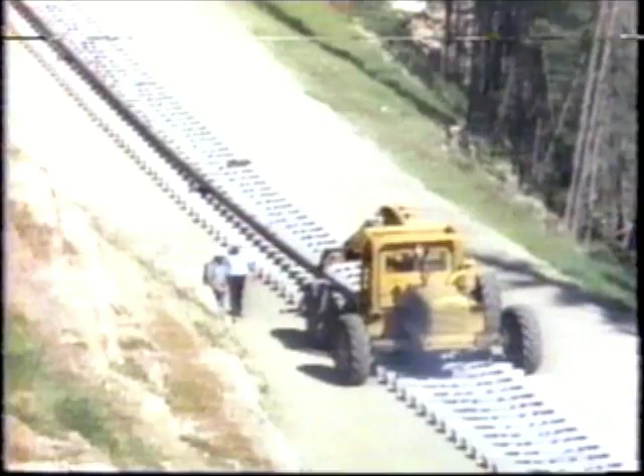The story of the building of the Canadian Pacific Railway more than a century ago is well known today, and it belongs to the heritage of our country. But now, there's a new story to be told: the story of the greatest railway construction project by CP Rail since that time.

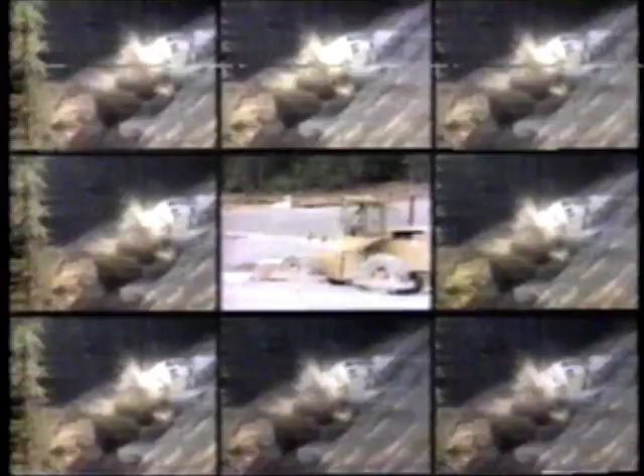This is a story of vision and foresight, of infinite planning and of inventive design. It's a story of intricate logistics and of complex machines, of sophisticated computerization and of basic construction. It's a story of massive dimensions and of pinpoint accuracy. But beyond all these, this is a story of human skills and endeavor, of extraordinary achievement, and of huge challenges met and overcome.

This is the story of the Rogers Pass project by CP Rail.

Rogers Pass, British Columbia. A wilderness little changed by time. Aloof, majestic, monumental, an awesome work of nature. Yet Rogers Pass has been railway territory for more than 100 years, and throughout that time, it has tolerated the railway, but has never been completely conquered by it.

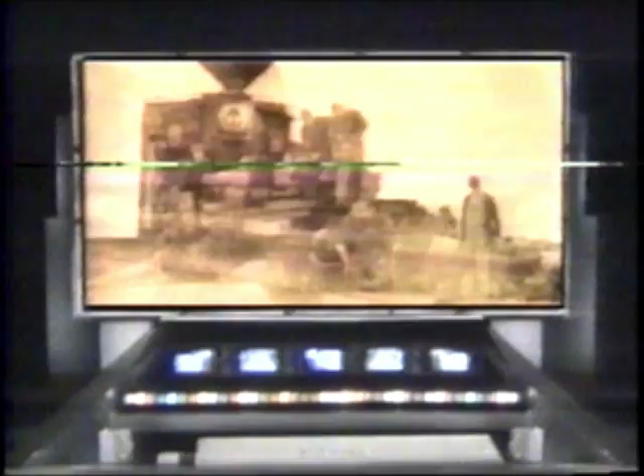Listen to Omer Lavallée, Canadian Pacific corporate historian and archivist, as he talks about the railway in Rogers Pass. At the time of the building of the railway in 1885, Rogers Pass was a formidable obstacle. It was only by sheer drive and effort of will, as well as by daring engineering devices such as the famous loops, breathtakingly high trestles, and toe-clinging construction on unsympathetic slopes that the builders confounded nature and pushed the railway through. But nature had her revenge.

Every year in Rogers Pass, an average of 970 centimeters of snow falls, enough to bury a train 2 or 3 times over. In the winter of 1885-86, a party of engineers was left at a camp in Rogers Pass, specifically for the purpose of observing the snow conditions and particularly the positions of known avalanches on the mountainsides. A major uncontrolled avalanche could really be very destructive.

On the basis of this information, in the summer of 1886, even as the first trains were running along the line, wooden snow sheds were built across the railway line at these danger points. As you can see, they diverted the fall of the avalanches and carried the snow safely across the tracks without blocking the railway. Lest the impression be given that this was the end of the problem, in fact it wasn't.

A completely different circumstance resulted in the line being abandoned in 1916. The pass was abandoned as a result not of the snow, but of the imperatives of increasing traffic. By the first decade of the 20th century, what is now CP Rail was experiencing a vast increase in traffic volume, in train size, and motive power and rolling stock had not yet begun to keep pace with it.

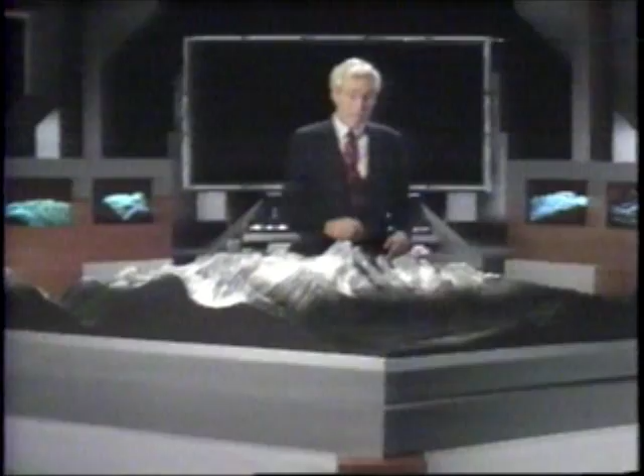Now, just what is the Rogers Pass project? Well, this grade reduction project has four major features: a 15-kilometer surface route, a short tunnel almost 2 kilometers long, a 14-kilometer long tunnel, and a very sophisticated tunnel ventilation system. The project begins here, near Rogers Pusher Station, where the pusher locomotives are now added to each westbound train. From Rogers, the route of the project goes west, along the steep slopes of the Beaver Valley.

This surface route is the first major feature of the project. On it, there are 4 bridges and 4 large concrete culverts on turbulent creeks and a steep gully. Finally, the surface route crosses a very long and complex viaduct structure.

And from there, the route enters a short tunnel, the second feature of the project, which takes it under the Trans-Canada Highway. The route then crosses the 5th bridge on the project and continues for a short distance to Mount Macdonald, where it enters the longest railway tunnel in North America, the 3rd feature of the project.

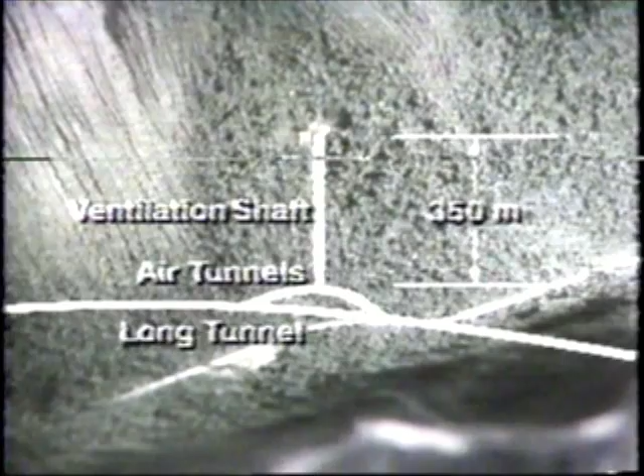This tunnel ends here, at the base of Mount Cheops, almost 35 kilometers from where the project began, back near Rogers Pusher Station. And the fourth feature of the project? Well, because the tunnel is so long, almost 15 kilometers, it has to be ventilated. So a large ventilation shaft from the top of this mountain goes straight down to the tunnel, 350 meters below. This shaft is the key to a unique ventilation system that clears the air so that the maximum number of trains can use the tunnel each day.

And that's the Rogers Pass project, a huge grade reduction program that will take more than 4 years of grueling work to complete. When the project is finished, the existing railway line will handle only eastbound trains going down its steeper grade, and the new line, with its reduced grade, will handle only westbound trains.

Now, how did the work on the project begin? Planning of Rogers Pass started back in about the mid-70s, so you can see it's been in the planning stage really at various levels for a considerable period of time. There were 4 different alternate routes looked at in the course of planning the actual route. The present route, that is the route that we finally constructed, was selected because it made the least effect on the environment. It allowed us to obtain the necessary grade that we wanted, and it was the best of the 4 for construction purposes.

There were extensive studies made of the proposed route: studies of the terrain, geology, environment, wildlife, water courses, visual impact. And then, of course, there were the basic considerations: can the project be built, and at what cost?

There were a number of approvals required. The first was from the Canadian Transport Commission, a very lengthy procedure requiring public hearings. There were also 2 years of environmental hearings at various locations throughout Western Canada. And finally, because most of the project is within the boundaries of Glacier National Park, a great deal of work was done with Parks Canada before final approval was received.

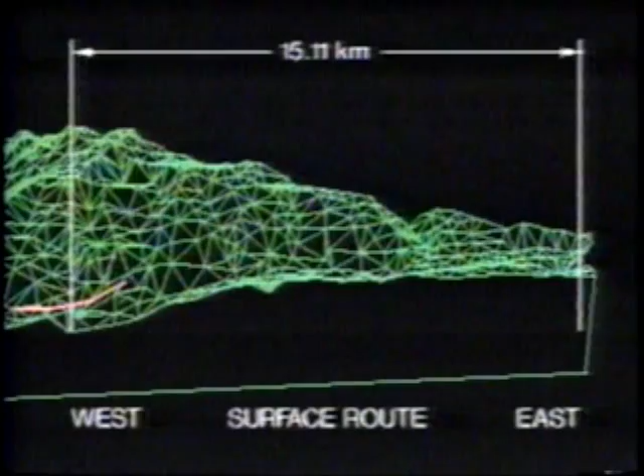Now let's take a look at the first major feature of the project, the surface route. The surface route is the key to the whole Rogers Pass project. Near the end of its 15-kilometer length, the reduced grade will be lower than the old line by the height of a 40-story building. Let's take a look at just what that involves.

Just west of Rogers Pusher Station is Cupola Creek Bridge, where the Rogers Pass project officially begins. Now you can see the position of the 2 railway lines, the old line on the right and the roadbed for the new line on the left. You can also see the grade reduction beginning to take effect already, as the old line, with its steeper grade, rises above the new line's roadbed.

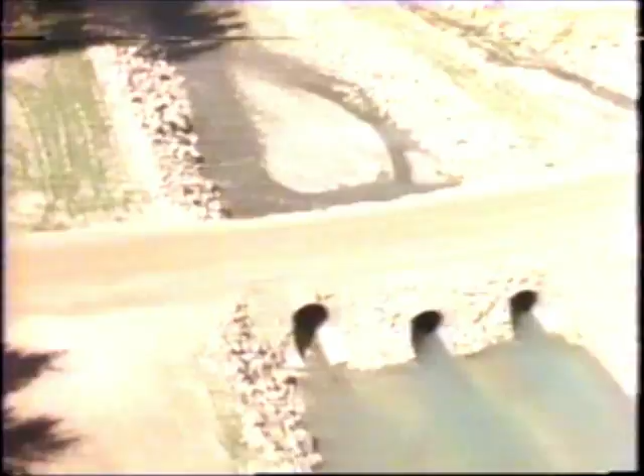Now let's see some of the construction challenges of this new surface route as we move westward. This is Alder Creek Culvert, which has already been completed and was a relatively straightforward construction. But here, the old line had to be moved back into the rock slope to make room for the new line between it and the Beaver River below. And here you can see the very narrow right-of-way in which the work had to be done because of its location in Glacier National Park.

Next is the site of the new Mountain Creek Bridge, which had some interesting problems to be solved. And just west of here is a major rock cut excavated to accommodate the new line. Opposite the rock cut, a huge embankment or berm will suppress the noise of passing trains at the nearby Mountain Creek campground. You can now begin to see the steep slopes over which the new line had to be built.

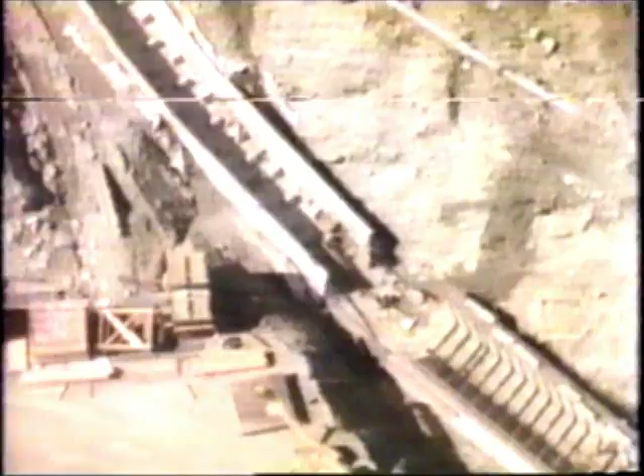Further west is the first of 3 concrete box culverts at Cedar Creek. Then another box culvert at Raspberry Creek, and a new bridge, Gully Bridge, over a dry gully. As we go west, the slopes and the construction difficulties become even more dramatic, as you can see.

This is the 3rd and last concrete box culvert at Surprise Creek. Can you imagine a constant 1% grade built through this formidable terrain? The survey work has to be extremely precise.

Next, the longest and highest bridge on the new surface route over Stoney Creek.

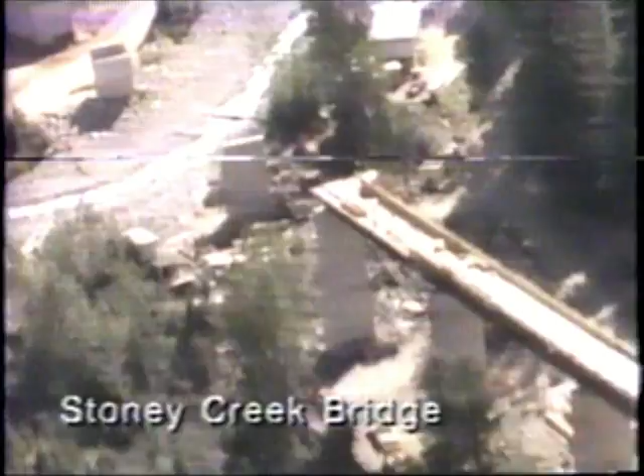Then, as we continue westward, we come to the site of the viaduct, one of the major engineering and construction challenges on the project, with its incredibly difficult slopes. We'll see these features in more detail later. But first, let's hear from some of the men who planned and built this route.

Here's John Fox. Well, to engineer a project the size of Rogers Pass requires, one, a lot of very competent people, and two, the use of a lot of engineering know-how. Ron Tanaka, Chief Construction Engineer, Special Projects, CP Rail, helps provide that engineering know-how.

All the engineering was done in Calgary before the work started. This began about 2 years even before construction began. The engineering work was done basically with the help of consultants. All the plans and specifications and contracts were prepared in our Calgary office.

And Norm Tennick, construction manager, special projects, CP Rail, is the man who sees that these plans are properly executed. My job is mainly to see that this project gets built, to put all the pieces together, to coordinate all the construction activities on site, including contractors, subcontractors, my staff.

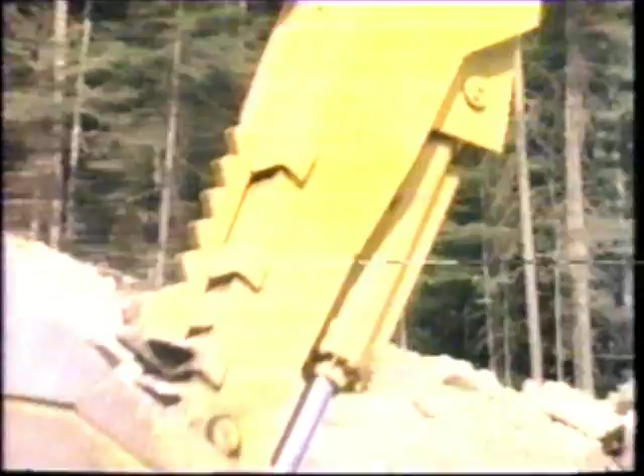The surface route comprised about 10 miles of new grade construction, mostly a cut and fill job involving over 2 million yards of excavation, of which 600,000 yards was rock. And traffic on the narrow right-of-way became an increasing problem.

But meanwhile, a number of complex construction challenges have been met and overcome on the surface route. Remember its 3 concrete box culverts and 5 major bridges?

Right now, we're interested in 4 of those bridges. The first is here at Cupola Creek. The challenge here was to keep trains running on the main line, while a new double-track bridge was built on the site of the old single-track one. So the old bridge was moved upstream out of the way, and trains were detoured over it while the new bridge was built in its place.

The second bridge is here at Mountain Creek, 4 kilometers further west and about 40 meters below the old line. The major considerations you have to be aware of when designing a bridge over streams, and in particular the streams that are in Glacier National Park, is you have to make sure that no part of the structure is within the wetted perimeter of the stream you're working on.

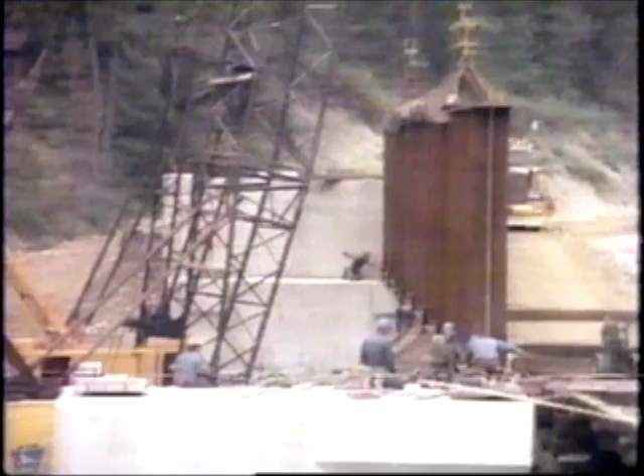That, of course, is an environmental protection measure. And as a result, one of the piers here at Mountain Creek had to have a specially lined dike built around it to prevent muddying the water during construction. The bridge has 2 48-meter spans, each weighing 250 tons, the heaviest on any of the bridges.

Next is Gully Bridge, about 9 kilometers from the start of the project. Gully Bridge, like all the new bridges on the surface route, was given a protective treatment of waterproofing before finishing.

Now, about 13 kilometers along the route, we come to Stoney Creek Bridge. The Stoney Creek Bridge is the highest and longest of all the bridges on the surface route. And because it can be seen from the Trans-Canada Highway, a lot of planning went into how it would look. As you can see, Stoney Creek Bridge was a major construction challenge. Work on the bridge began in 1984.

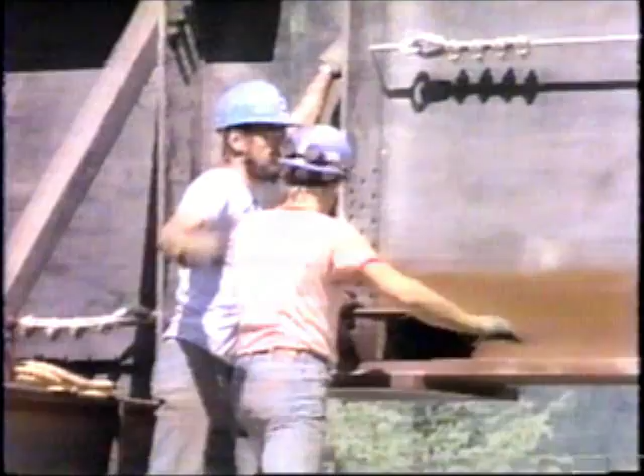The span that crosses over Stoney Creek itself is an extra long span, about 170 feet in length, and it was put there really to ensure that the piers on which it sits were not in the wetted area of the stream. Greg Hamilton, project engineer, special projects, CP Rail, hasn't forgotten those bridge spans or any other bridge spans on this project.

The one problem we did have with all bridges was movement of the spans to the site from the highway. In some cases, we had to get special permission from the Parks Canada people to cut down additional trees outside our right-of-way in order to move the spans to the site.

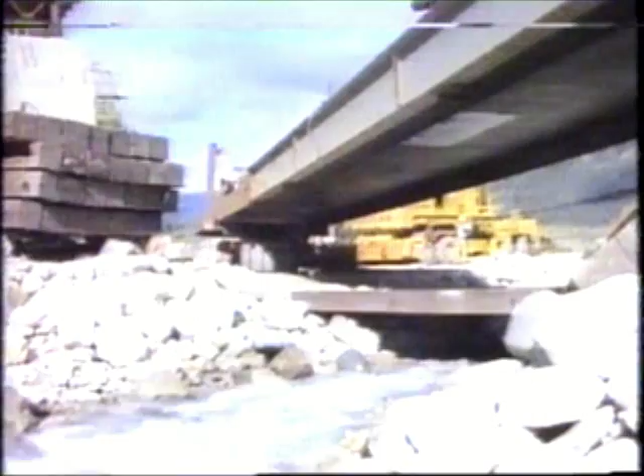But in spite of the difficulties, Stoney Creek Bridge and all the other bridges were finished on schedule. But there are other creeks on the surface route with a different kind of challenge.

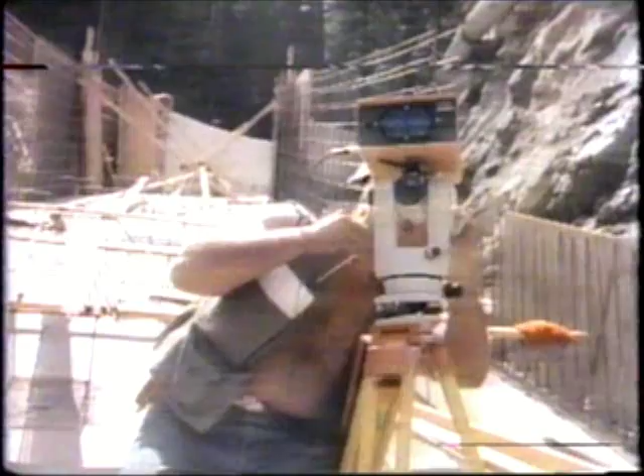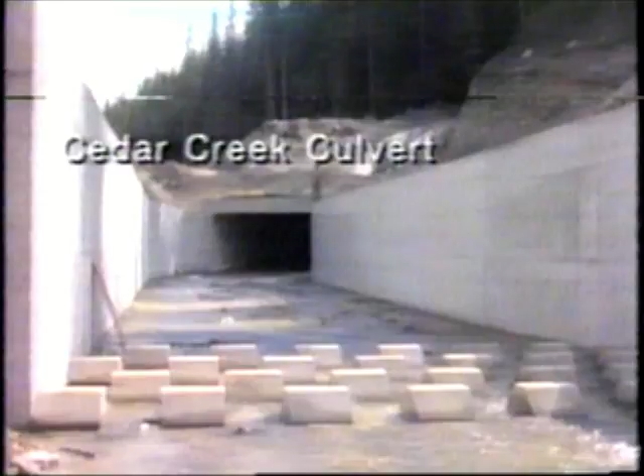Another interesting thing is that inside these culverts we have concrete energy arresters, which look like a series of tombstones. Their purpose is to dissipate the energy caused by the steepness of the culverts and the amount of water and debris coming down them. If you don't stop the energy of the water, it would cause erosion on the downstream end.

So you see that crossing a tiny mountain stream is not a simple matter. But that was only one of the many challenges on this project.

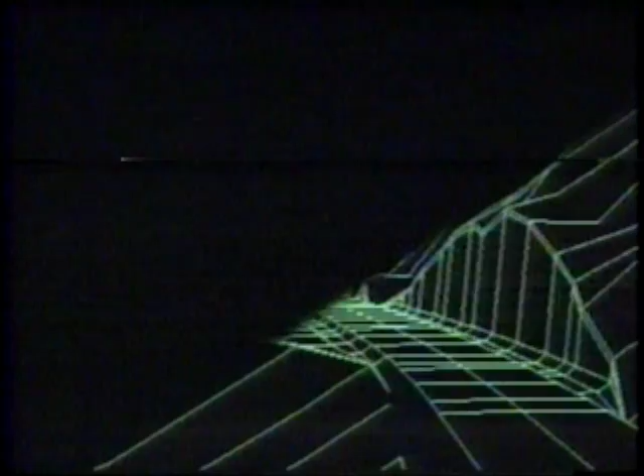Of course, the visual impact of a job of this size is important. One thing we did, which I think was a first, was use a computer to show us what it would look like after we were finished. From this, you could really determine the actual visual impact of what we were going to do.

Retaining walls are used in areas where you don't want huge cuts uphill or large fills downhill, which would become visible in terms of impact to visitors to the park, and ourselves for that matter.

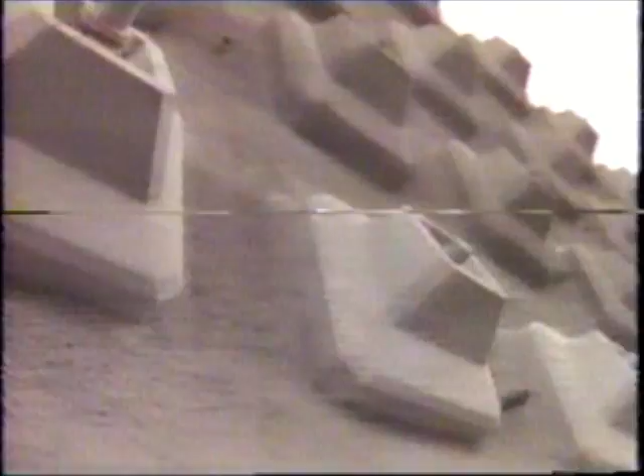In our case, the main factor influencing use of retaining walls was the slope of the terrain we had to excavate through. Being roughly 40 degrees, if we allowed the excavation wall to be on its natural slope, it would have undermined the existing main line, so we needed the most vertical retaining wall possible to prevent that. On the downhill side where we have fills, without a retaining wall the fill would have encroached onto the Trans-Canada Highway or the Beaver Valley below.

There are a great variety of retaining wall types. In our case we used shotcrete walls for uphill retaining walls, and a precast, tied-back type wall for downhill. The Type 1 retaining wall is basically two 2-inch thick layers of shotcrete reinforced with welded wire mesh.

The Type 2 wall is similar, except that there are ground anchors installed in a 7 by 7 foot pattern.

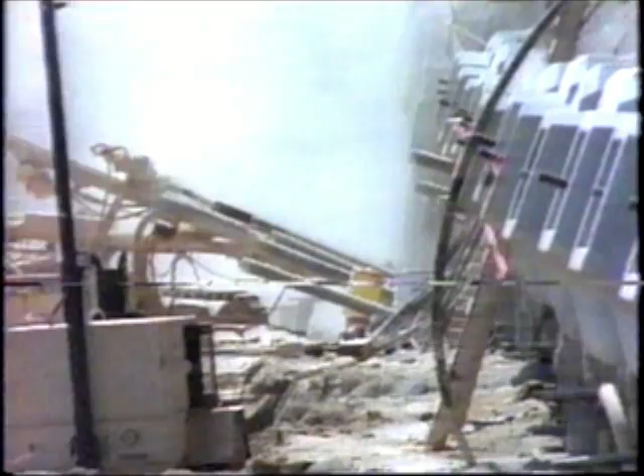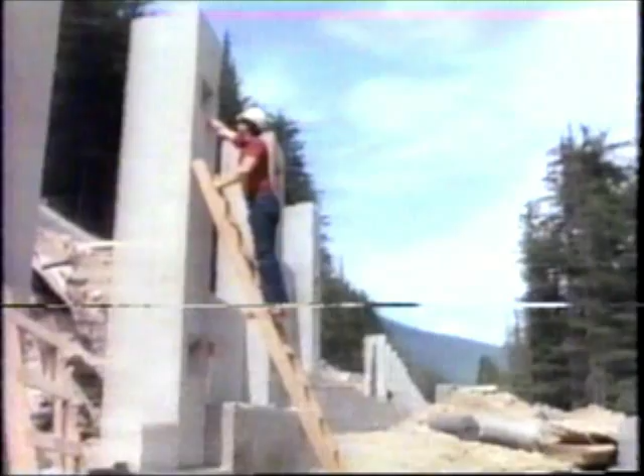The Type 3 wall is basically a series of precast soldier piles standing at 10-foot centers along the downhill line. It is a downhill retaining wall. Precast segments of lagging are installed between the soldier piles, and then the entire area between the original ground and the retaining wall is backfilled with local material to create a new subgrade.

The three major types of walls we used, I don't think they're absolutely unique to the Rogers Pass job—they've been used on other projects. I think the extensive use we made of them is perhaps unique. It involved about 230,000 square feet of retaining walls with about 120,000 lineal feet of ground anchors to support them, mainly because of the necessity to keep the right-of-way as narrow as possible going through the national park.

And next, that narrow right-of-way presented the greatest challenge of the whole Rogers Pass project: the 1,200-meter-long viaduct. Take a look at the problem from the air with Ron Tanaka.

The viaduct is a unique solution to the challenge of the terrain. The slopes, at 40 to 42 degrees, are steeper than anywhere else on the surface route. Ordinary cut and fill methods can't be used because they would undermine the existing track, and the new downhill slope would extend over the Trans-Canada Highway where it approaches the new line. Here's John Fox on the subject of this most difficult part of the project.

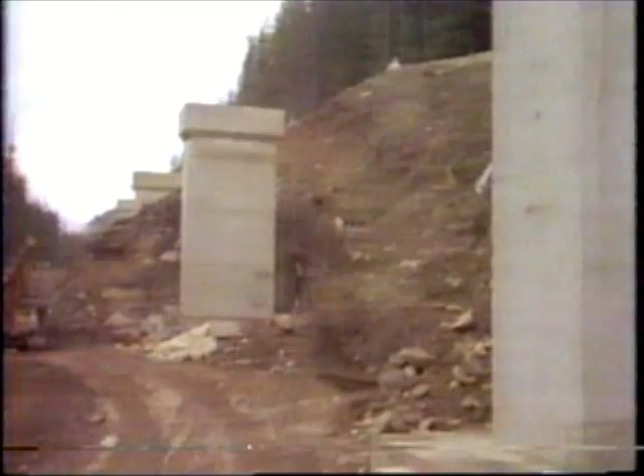The main concern in trying to design the viaduct was to try to design a footing on this 40-degree slope. The main difficulty is because of the 40-degree slope, there are side hill movements, and it's trying to design a footing to counteract this tendency of the mountain to move downhill on this 40-degree slope. Trevor Webster, Deputy Chief Construction Engineer, Special Projects CP Rail, explains how this was done.

Each pier will be built on a concrete footing and will be tied back into the slope with ground anchors. For additional stabilization, steel micropiles are sunk from each pier 10 to 15 meters into the ground. Access had to be maintained to every single pier in order to construct it, and each pier was at different elevations, up and down through gullies and hills, so access was extremely difficult.

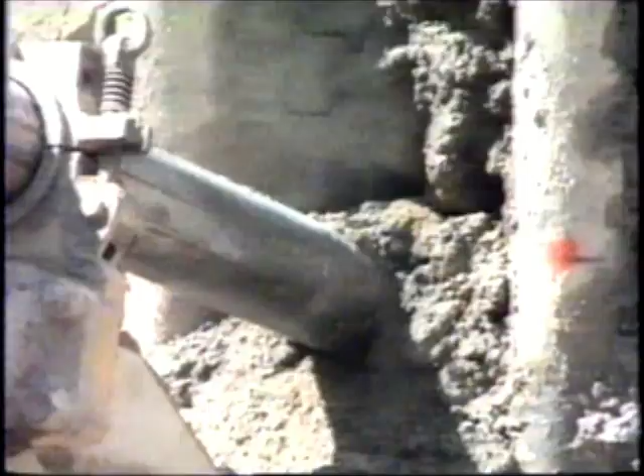Let's see how it was. First, the stabilizing ground anchors and micropiles were drilled and installed, as many as 30 micropiles for each individual pier.

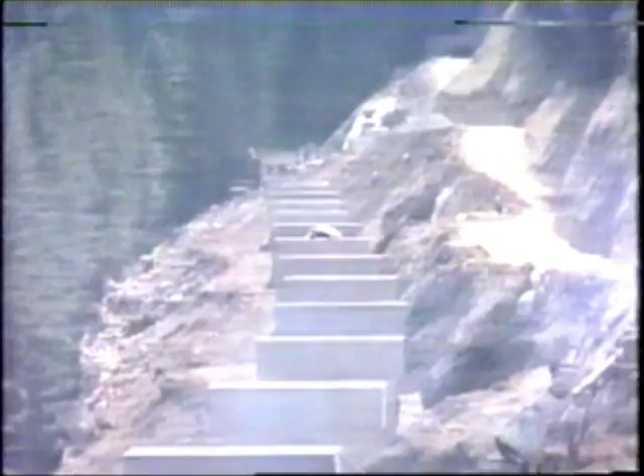Then forms had to be built for every one of the 44 piers, every one at a different height and in different conditions of slope and soil. Tons of concrete were moved in over the twisting tracks cut into the narrow slope. And finally, after 3 years of grueling work, the very precise construction of the whole kilometer-long viaduct could begin to be seen in this restricted and unfriendly terrain.

An interesting feature of the construction of the viaduct will be the erection of the spans. The method of installing the 45 spans on the viaduct was done by means of what we call a launching machine, or a launching bridge.

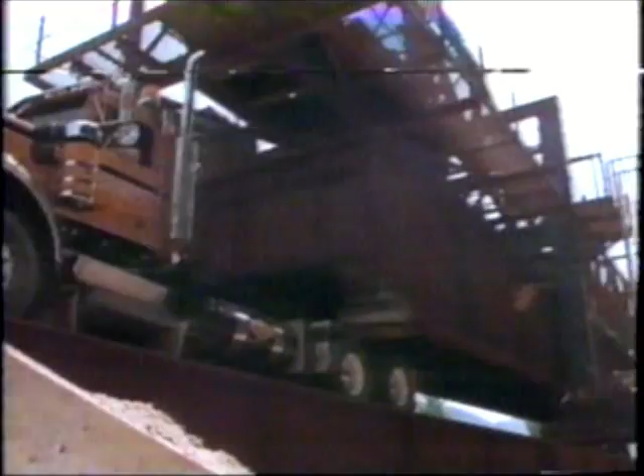The spans arrived by rail and were offloaded at the west abutment of Stoney Creek Bridge and loaded at that point onto a truck with a steerable dolly. The truck then backed across the completed grade to the viaduct and then approached the underside of the launching truss which sat on the viaduct. At that stage, it backed underneath the launching truss.

The launcher picked the span. The truck then drove back to the west abutment of Stony. The launcher then advanced the new span on a trolley system to its final location, lowered it in place, and then the whole launching truss advanced onto the newly installed span and awaited the next delivery.

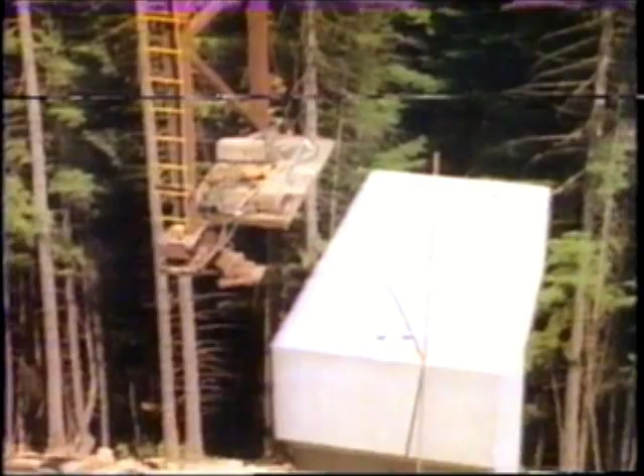Launching spans actually proved to be one of the brighter lights on this project. It went very well. The superstructure was constructed in 1 month. Insofar as the surface route is concerned, when we put the last span in that viaduct, the 45th span, when it went in, we broke open a few bottles of champagne that day. And that was a real highlight.

Well, you've seen the struggle with nature on the surface route, the building of its bridges, culverts, retaining walls, and the biggest challenge of all, the viaduct. But how did the environment come through all this? Let's take a look.

Remember this? Well, this is how that same area looked soon after the viaduct was completed. And now John Fox talks about the environment, its protection, and the reclamation of it that you see here.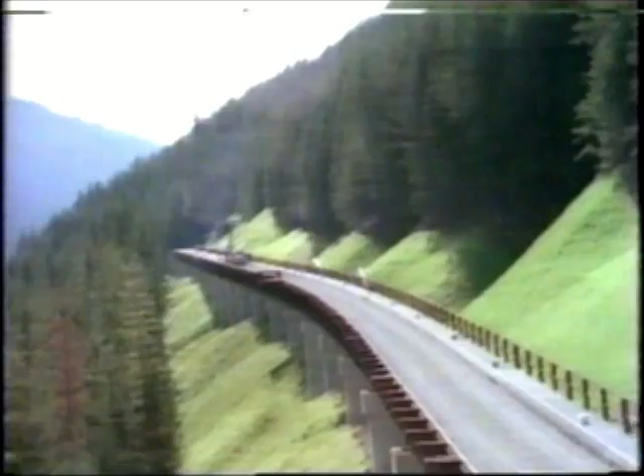The size of our Rogers Pass project meant that we were disturbing a very large part of the environment, and it required constant looking at on our part to ensure that we were living up to all the requirements of good environmental protection. While you're actually doing construction work, you have to worry about the environment and watch such things as oil spills, fuel spills, particularly from equipment that's working. You have to worry about bulldozer operators pushing fill or refuse into rivers. You have to worry about garbage around the construction site. We have people constantly watching for this sort of thing to ensure that doesn't happen.

The main purpose of reclamation work is to ensure slope stability. In addition to that, you have a responsibility when you go in and disturb land to restore it as near as you can to its former looks or beauty. In our case, it's beauty. And we have no right to go in and destroy something and leave it that way. Dave Polster, Environmental Supervisor, Special Projects, CP Rail, tells us how the environment is restored.

We'll be reclaiming continuously here as the grade is built. We'll get right in right after sections are completed, and even before the entire section is completed, we'll be reclaiming on the job. Parks Canada and CP Rail have reached an agreement regarding all aspects of the job, but particularly the environmental aspects, and we have a very rigid set of standards which we have to adhere to.

We expect that we'll be using somewhere in the neighborhood of 30,000 pounds of grass and legume seed and about 100,000 pounds of fertilizer.

We've ordered well over 600,000 trees and shrubs to be used in the reclamation project. The exact formulation was worked out between myself and Parks Canada in terms of enhancing wildlife values in certain areas, trying to keep wildlife away from other areas, things like erosion protection, and getting the new grade to look like the surrounding terrain. Certainly the environmental aspects of the job are built right into the heart of the project.

And Parks Canada has used it, I understand, as a standard for future projects of this nature. Reclamation work won't be considered finished until at least 5 years after construction is complete. And it will cost CP Rail several millions of dollars.

But now let's move on to the second major feature of the Rogers Pass project, the short tunnel, or the Mount Shaughnessy Tunnel, which goes from the viaduct to here, just across the Trans-Canada Highway. And why a tunnel? Listen to John Fox.

The first thing we looked at in the design stage was how we're going to get across this Trans-Canada Highway. We had one scheme where we would have come across the highway about halfway up the hill on a very, very high bridge. The big problem with that was snow, besides visual impact on the valley. We would have been plowing snow off a bridge and right onto the highway, and Parks Canada wouldn't have thought too much of that.

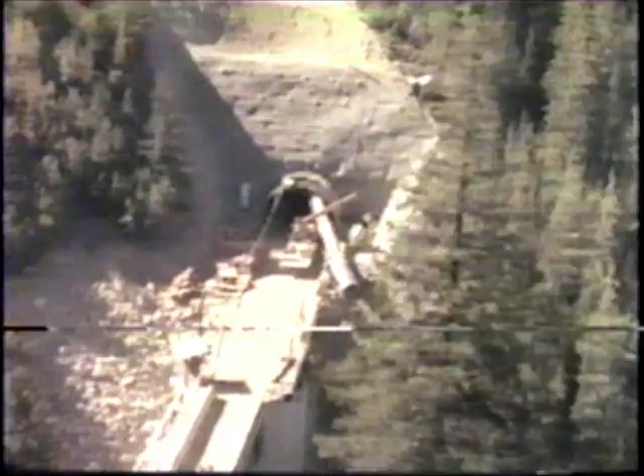And it comes out here below the Trans-Canada Highway. But curiously enough, the tunnel was built from this end back to the east end. Pete Penner, Tunnel Superintendent, Special Projects, CP Rail, tells us why.

Access to the east portal of Shaughnessy was very restricted because of the construction of the viaduct, and accordingly the contractor had to drive the tunnel totally from the west end. So only external work on the east portal was done. But the tunnel coming from the west had to meet that portal dead on.

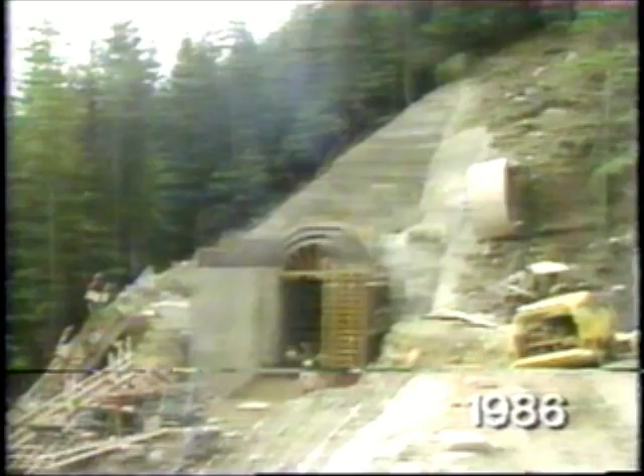Getting equipment and materials into this site was always a very difficult task through the congestion of other work on the surface route. Meanwhile, at the western end of the tunnel, work began with the construction of the Connaught Creek Bridge, the fifth and last bridge on the project. It had to be built first to provide access to the working face of the tunnel.

But remember the Trans-Canada Highway just above the west portal? Here's Ron Tanaka to tell us about the challenge that gave to the project planners.

From our geotechnical investigations, we knew that each end of the short tunnel would go through overburden. As a matter of fact, on the west side, we go right underneath the Trans-Canada Highway through an overburden section, and the depth of soil between the Trans-Canada Highway and the top of the tunnel is only about 40 feet. We were always concerned about this because in most tunnels going through overburden, there is always the possibility of subsidence or depression of the surface above, and in this case it was the Trans-Canada Highway.

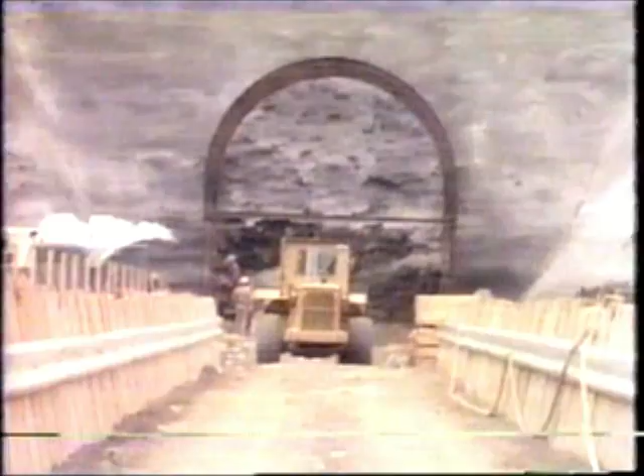What we did was grout the soil between the Trans-Canada Highway subbase and the top of our tunnel, so that when we went through with our excavation, there was basically a massive grout, not soil anymore, it was consolidated grout, which prevented any settlement of the Trans-Canada Highway. After that, building the tunnel could proceed. The west portal was finished, and inside the tunnel became a typical mining operation.

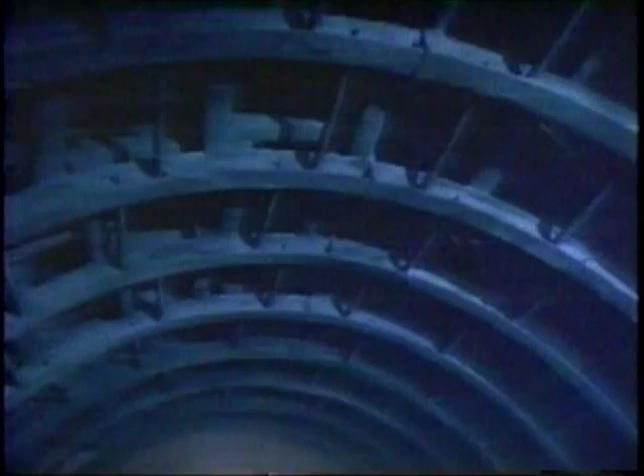It was built by the top heading and bench method. First, the top half of the tunnel is cut out and reinforced with steel ribbing and shotcrete where necessary. Then the benching operation removes the bottom half to complete the full depth of the tunnel.

But unfortunately, it wasn't all as simple as that. Listen to John Fox. The short tunnel gave us some real problems this past year in terms of soft rock, which we knew was there from the investigations we did. What we didn't know was it was going to come down on top of us after we passed it, requiring extensive support systems to be put in the tunnel and also a concrete lining in an area which we had not considered in design.

Nevertheless, the short tunnel, or the Mount Shaughnessy tunnel to use its proper name, did get built. And here, John Fox and Pete Penner are looking over another interesting feature of the tunnel work. At this point, we're between the two tunnels of the project, the short Mount Shaughnessy tunnel that we've just seen and the much longer Mount Macdonald tunnel just ahead.

Between them is a short section of surface route, not quite 1.5 kilometers long. But in that short stretch is a huge depression known as the Bear Pit, and the new railway line will have to cross it.

It will take about 400,000 cubic meters of material to fill the Bear Pit. And where do you think all that fill material will come from? Right, from the two tunnels.

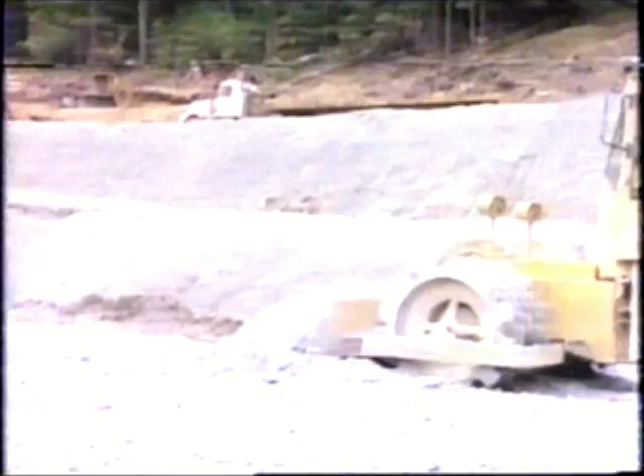So this is one depression that serves a useful purpose. If it hadn't been here, all that rubble, or tunnel muck as it's called, would have had to be removed from Glacier National Park for disposal somewhere else.

And of course, when reclamation is finished, the whole area will look a lot better than it did before, as you can imagine from what has already been done.

But now, let's get on to the third major feature of the Rogers Pass project, the Mount Macdonald Tunnel, or the Long Tunnel, which goes under two mountains and is the longest railway tunnel in North America.

The Long Tunnel begins here at the eastern end of Mount Macdonald. It goes under the mountain, under Rogers Pass, and under Mount Cheops to come out here, almost 15 kilometers from where it began.

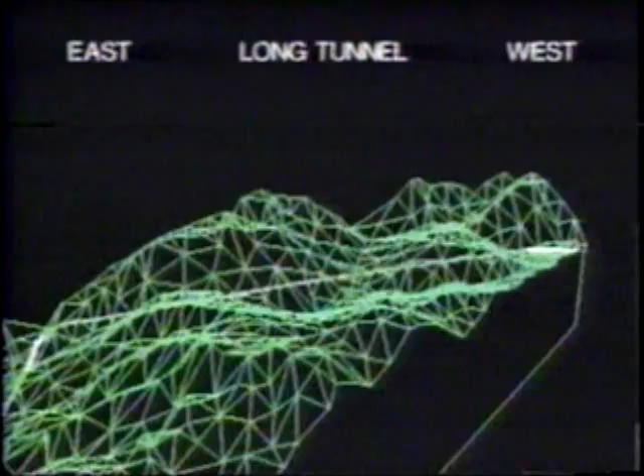The new tunnel will be 109 meters below the old Connaught Tunnel and 290 meters below the summit of the pass.

But the very length of the tunnel created some problems in construction. It was necessary to excavate the long tunnel from both ends, really to save time in terms of getting the job done. Because of the length of the Mount Macdonald Tunnel, it would have not been practical to do the excavation and concreting completely from one end.

The entire tunnel is about 47,000 feet long, and doing it from one end would have taken about 5 or 6 years. Plus the fact by cutting it from each end, we were able to give it to 2 contractors, and there's always this feeling of competition between contractors to do a faster and better job, and this, I think, aided in the progress of the work.

Another thing too we had to consider was that if one contractor, doing it from one end, encounters some geotechnical problems, the entire rest of the tunnel would be delayed. By cutting it from 2 ends, if one contractor had a problem, the other contractor probably would have been able to continue. And how would the contractors cut the tunnel?

Construction methods used in excavating the long tunnel were really left up to the contractors. We, that is the railway company, we didn't dictate how they could do it. It was left up to the contractors themselves. And really what dictated the different methods was the type of rock.

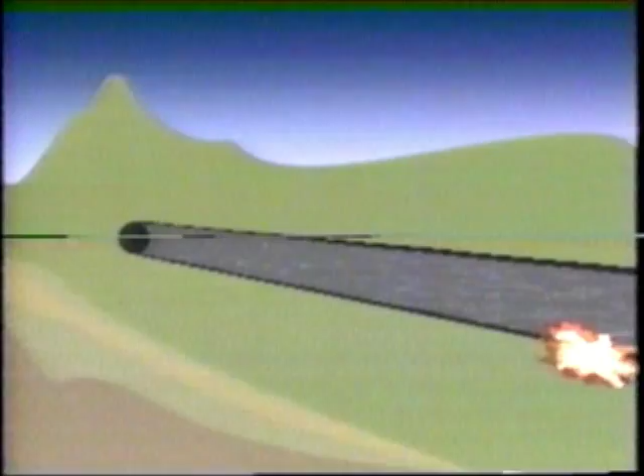The 2 methods used to excavate the tunnel: on the east end, the contractor elected to use a 22-foot diameter mole to take out what we call a top bench, and then come in behind and take out the bottom bench to give us the shape of tunnel which we wanted. Whereas the contractor from the west end, he decided to go full face and excavate the entire face as he went in one shot. So we have 2 sides to the Mount Macdonald Tunnel and 2 different construction methods, and maybe even a race to finish first.

Now, here's the east portal of the Mount Macdonald Tunnel, away back in 1983. Let's watch it progress.

Work started on the east portal in August 1984, with the first blasting into the rock face. The tunnel began with the conventional top heading and bench method for a short distance into the rock, and work was started on the portal structures.

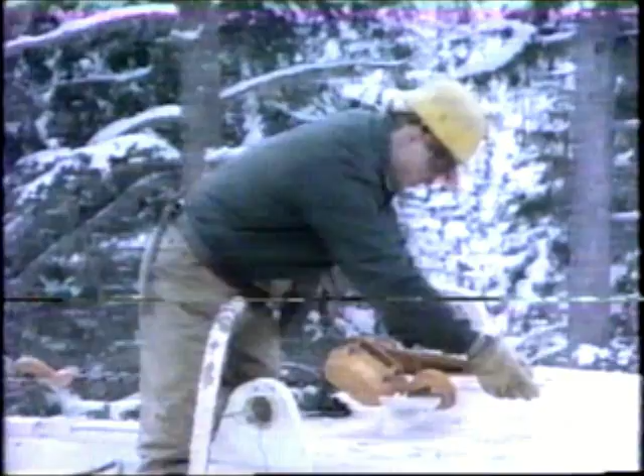Then, in late 1984, the star of the tunneling work at the east portal arrived and was assembled in the snow. This was the tunnel boring machine, or the mole, as it was called. The biggest problem was that the contractor was assembling a white-painted mole in the middle of the winter, which made finding parts somewhat difficult at times.

But driving a tunnel through the rock of the mountainside did present some greater challenges than that. The kind of information we need in designing this long tunnel is basically all kinds of geotechnical investigation. We have to find out whether the tunnel is going through overburden or rock, and also try to determine what kind of rock it's going through, whether there are faults, whether we're going to hit water, whether we're going to hit gases - all these things which you always encounter in tunnels.

We get this information basically by two methods. The first thing we did is go out and examine the surface, and by examining the surface contours and the ground types, and also the location of faults at the surface, the geotechnical people are able to predict whether we're going to hit these faults down below or not at tunnel level.

The second thing we did was to drill a series of diamond drilling holes to examine the type of rock or soil in which the tunnel will be going through.

The long tunnel, Macdonald Tunnel, is a 47,000-foot tunnel driven in phyllites, which is a very soft rock, and quartzite, which is very hard. Most of the phyllites are in the eastern section, so the contractor chose to drive a top heading there with a TBM, 22 foot 4 inches in diameter, and then take out the bottom by conventional drill and blast, or a benching operation. The finished tunnel will be 5.2 meters wide and almost 8 meters from rail to roof, and it will be concrete lined, lighted, and ventilated.

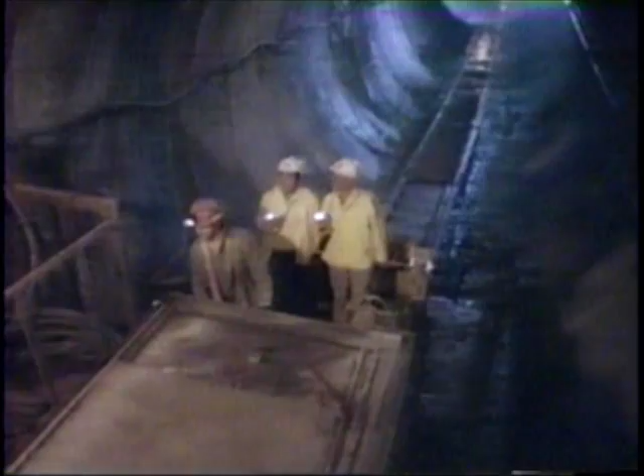The main difficulty in constructing the east portal, or east section of the long tunnel, is its length. The total length on this contract was 27,400 feet, and the difficulty in these longer tunnels of 5 miles or more is the transportation of all the men, the materials, the muck coming out of the boring machine, the explosives when we start drilling and blasting the bench, and the concrete. It's the organizing of the transportation and handling of materials that becomes the main problem.

The mole is about 18 meters long and weighs over 300 tons. Up front, on the rotating cutter head, there are 52 cutting discs that grind the rock into small pieces which are scooped up. Two muck trains are in operation, one being loaded while the other empties. The mole can be steered through curves and adjusted up or down to ensure an accurate heading.

But the mole did have some difficulties. The bearing came apart on the mole and caused about $1 million in damage to the machine, and lost 2.5 months getting it repaired. After that, we were concerned that the mole would stand up for the rest of the excavation - there were still 3.5 miles ahead of us.

The rock was better than anticipated, and the mole, in spite of the 2-month breakdown, did finish tunnel boring on schedule.

When all systems were working, the mole would average possibly 140 to 160 feet, about 150 feet on average. Its best production - we set a record for that size of mole in this kind of hard rock - was 206.3 feet in one 24-hour day. So the mole bored 5 miles into the mountain, right on schedule.

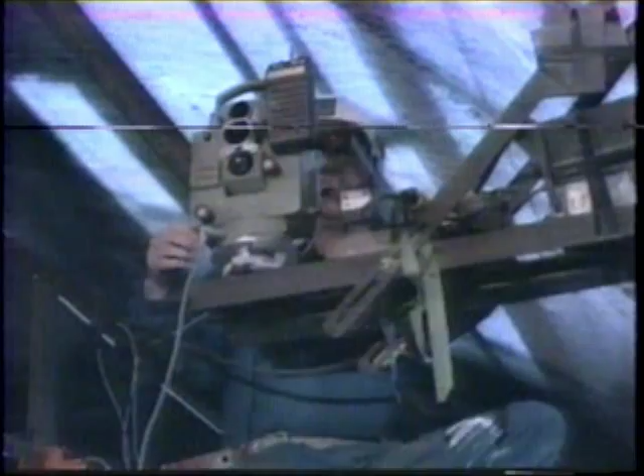So, how's the alignment coming today there, Tom? Half an inch high. To check on the accuracy of the tunnel, a survey is done by CP Rail every 240 meters that the tunnel advances. This survey is performed with electronic theodolites to check the alignment and height of the recent excavation.

Satellites were recently used to check the primary surface control points at both the east and west portals. This is the first time that global positioning system satellites have ever been used in an underground mining operation.

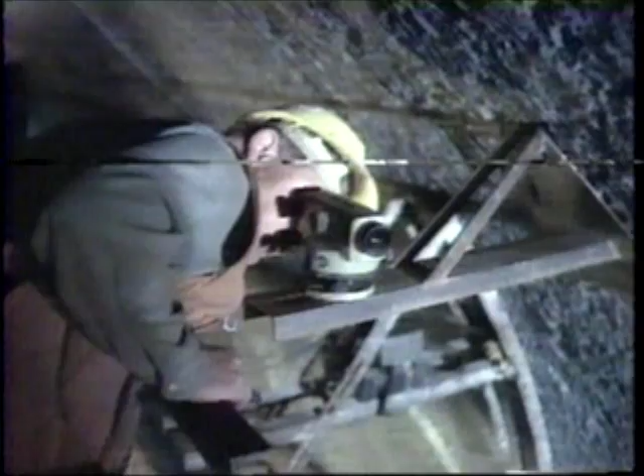From these satellite-verified surface points, the survey control is brought forward to the working face by conventional survey methods. This survey control is then used to align the laser beam that guides the mole.

The benching in the east portal entailed taking out the bottom 11 feet of the tunnel. The mole bored 22 feet, and in order to get the tunnel configuration we wanted, a square section had to be taken out of the bottom of the tunnel.

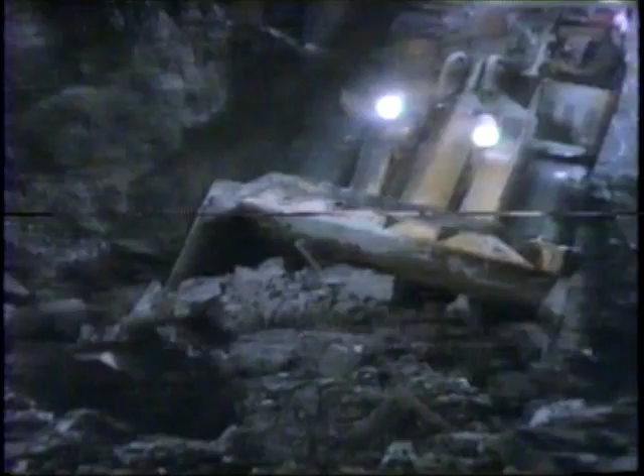After benching is completed, the contractor has to go in and backfill the sub-invert and install the drain pipes. Then he pours what we call a pony wall, or starter wall, in order to align his main arch form. The starter wall also embeds all the electrical utilities and services we require for the permanent tunnel operation.

After the pony wall is poured in the east tunnel lining, the contractor uses a traveling form so that the concrete is advancing continuously. He has a 288-foot form which keeps moving ahead of itself. It's sort of an inchworm principle, you could call it, I guess.

Now, did all this work on the tunnel have any effect on the environment? The construction of the tunnel basically would affect the water courses in and around the project, mainly because of the ammonia released from the blasting powder used in excavating the tunnels.

We have at each portal of the tunnels a huge wastewater treatment plant, and all the water coming out of the tunnels, which does have some silt and oils in it because of construction activities, is cleaned out before it enters the streams in the parks.

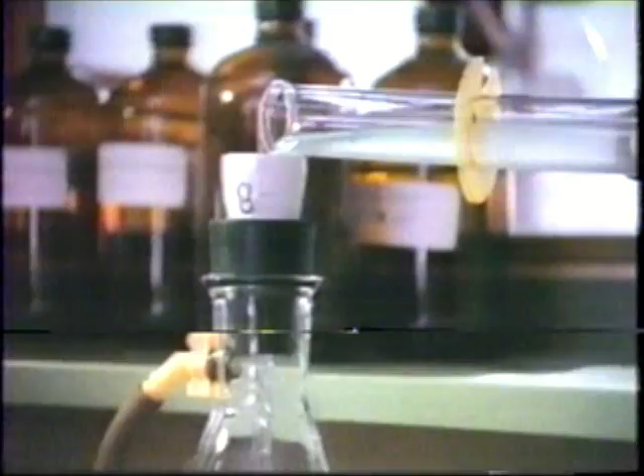In addition, vital tests of the various processes of construction are carried out in the lab and on location throughout the project.

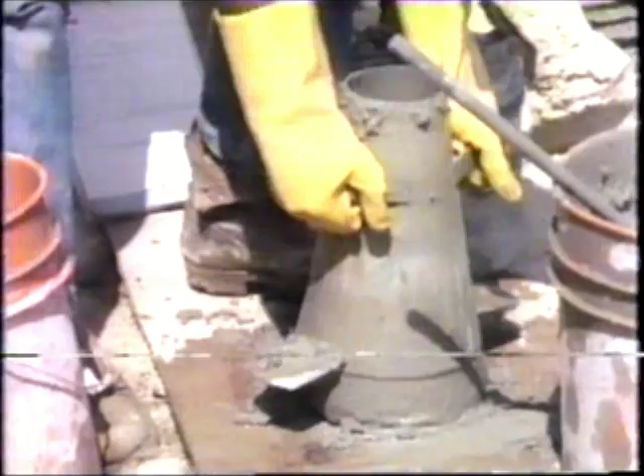Now let's go on to the west portal of the long tunnel. As we leave, we'll get a good view of the east portal.

This is the summit of Rogers Pass. We're roughly following the direction of the long tunnel, which is about 340 meters below the slope of the mountain. And here's the west portal, coming out of the mountain below Mount Cheops, 14.7 kilometers from the entrance.

You can get a better idea of the size of the tunnel from this angle. It's much bigger than it looks from the air. Here we use the drill and blast tunneling technique, which is standard mining procedure. Okay, Ron, let's go inside and take a look.

Now this is the way the finished tunnel will look.

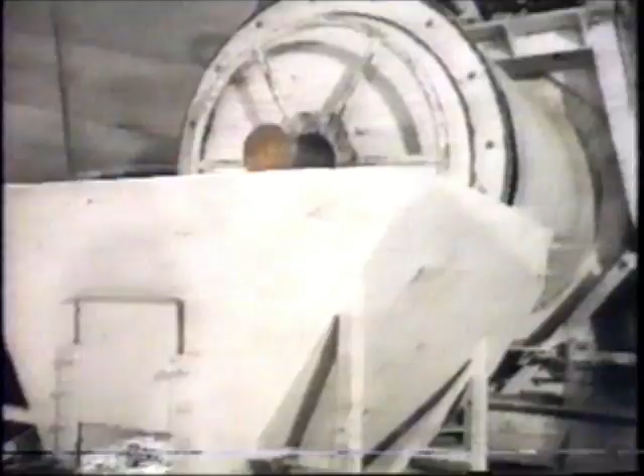Lining is done with a movable 25-meter long steel form. Concrete brought in by rail-mounted agitator cars is pumped in behind the forms to build the finished walls and arch of the tunnel. On average, 15 meters a day can be completed by this method, with crews working in 3 shifts, day and night.

You see the difference in the two tunneling techniques. At the east portal, we saw an unfinished tunnel until the very end of the work. Here at the west portal, the finishing of the walls and arch progresses as the tunnel is cut forward. Then we come to the unfinished part of the tunnel.

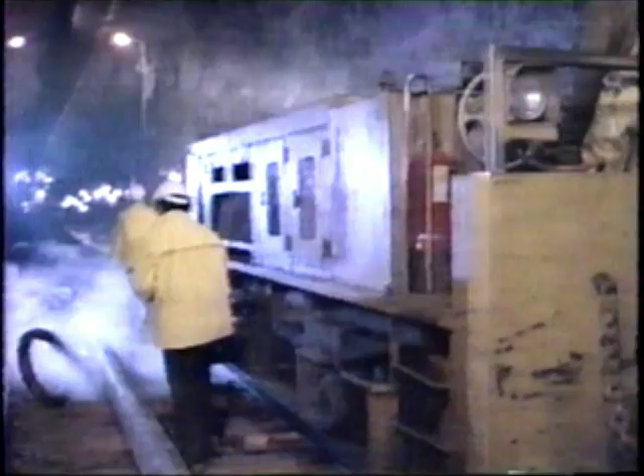Let's listen to Ron Tanaka. This is the beginning of the process of drilling, blasting, and mucking out the rubble. The jumbo drill cuts 100 holes about 4.3 meters deep into the rock face. The drill holes are filled with explosives and blasted out.

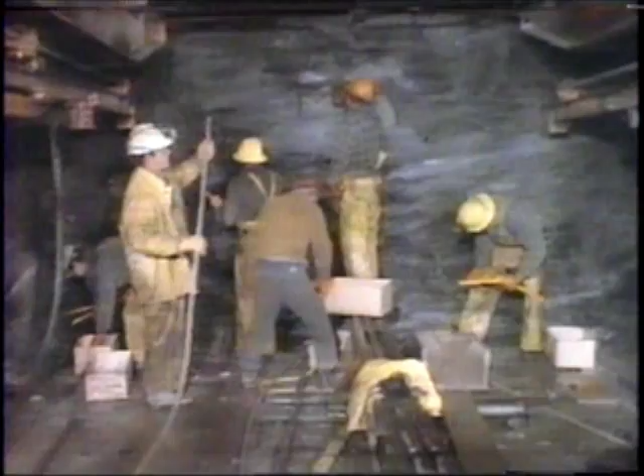The blast loosens the rock, and then the loader moves in to remove the rubble. With this technique, in 3 shifts a day, about 4 cycles of drilling, blasting, and mucking can be done. This advances the tunnel about 15 meters each day.

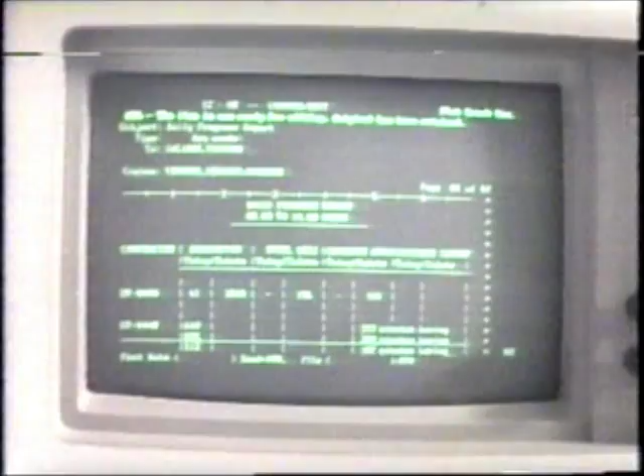The actual construction progress of the tunneling was monitored on a day-to-day basis by my own engineers in the field, and of course precise records have been kept of the actual daily footage that was accomplished.

Staff geologists map the rock in the tunnel every day. It provides a necessary basis to determine permanent support for the tunnel rock. From this mapping, the geologists then decide where to place rock bolts to reinforce the tunnel walls. Because rock is not a homogeneous medium, rock bolts are used to stitch it together.

Okay, if rock bolts are used to reinforce the tunnel, why does it have to be lined? The short tunnel isn't lined. The lining in the long tunnel is required strictly for ventilation purposes. It's not a structural lining. There's no reinforcing in it other than in a few places where we have less than adequate rock support. But generally it is strictly to make a smooth pipe for airflow. We'll come back to that airflow later.

But now, what about lighting? Does a tunnel really need to be lighted? Tunnels generally are not illuminated in North America. They're generally quite dark, and when it comes time to do any work in them, you have to take in either portable generators or whatever to provide the light for the workmen to work in. It's really not the way to work. When we designed the Mount Macdonald and Shaughnessy Tunnel, we'd made up our minds we had to have power up there anyway. So let's put some lights inside so at least our maintenance people can see what they're doing.

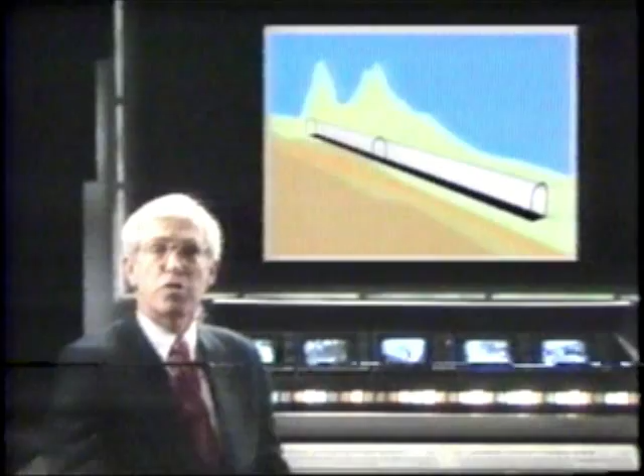The ventilation system for the long tunnel is the fourth major feature of the Rogers Pass project. It is very sophisticated and is the only one of its kind in the Western Hemisphere. It has three key elements: a divided vertical shaft from the top of the mountainside to the tunnel, an arrangement of very powerful fans for pushing and pulling air through the tunnel,

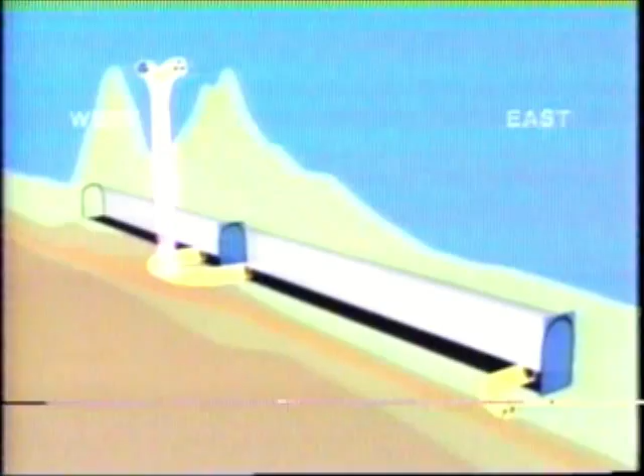and two automatic gates which control the flow of air in the tunnel as trains pass through. As the train approaches the tunnel from the east, the portal door opens, and a cooling flow of air is drawn from the ventilation shaft and pushes exhaust gases out through the portal. At the center of the tunnel, the automatic door lets the train through, but then closes again as a cooling flow of air is drawn from the west portal and out the ventilation shaft.

For cooling and purging purposes, the long tunnel is effectively divided in two, which means the operation can be done much faster, and trains can pass through at intervals of about 35 minutes. This may sound like a long time between trains, but a unit coal train with more than 100 cars will take about 30 minutes to pass through the tunnel. So you can see that the operation will be very efficient, and it's expected to increase daily westbound capacity from the present 15 to at least 24 trains per day.

But building the 350-meter ventilation shaft for this system was a challenge all its own. In the design of all shafts, most designers try to find an area where there is as little overburden as possible, because excavating and constructing through overburden in a shaft is very expensive. The initial location we had in our choice for a shaft was an area where the rock was exposed to the surface, which would minimize the amount of overburden we had to dig through.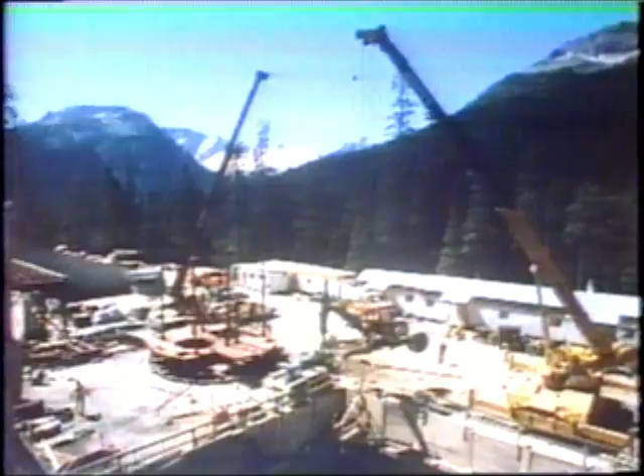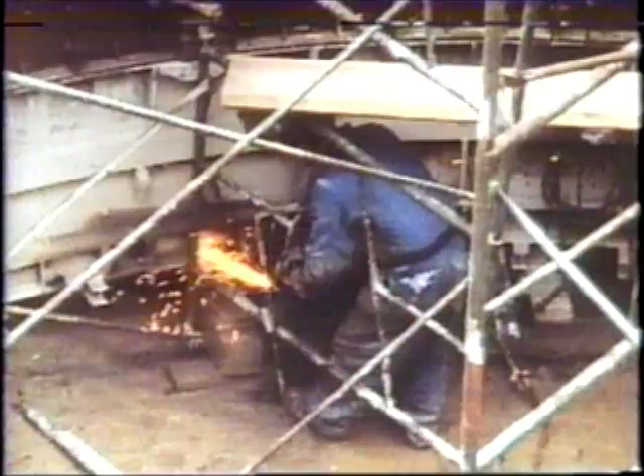In excavating the shaft, the most difficult geotechnical problem to overcome is the infiltration of water. And it's not just the quantity of the water, but the mixture of the water and the type of soil which seeps into the excavation. It makes it very difficult to support the walls of the excavation while construction is going on.

In sinking through the overburden, we encountered water problems that the contractor could not handle, and consequently we ended up having to freeze the last 150 feet of overburden in order to excavate through it. This was done from the inside of the shaft, which to my knowledge was the first time that a shaft of our size had ever been frozen from the inside.

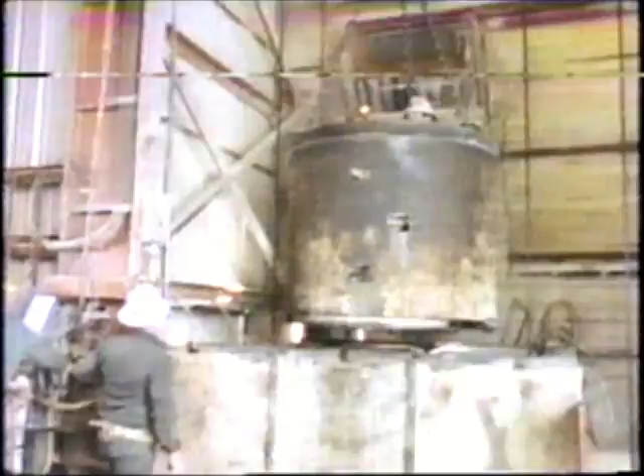This involved drilling 48 holes on a fan, fanning out from inside the shaft to form a perimeter of freeze holes, pumping brine through the holes and freezing a 6-foot thick ice wall minimum, and then sinking the shaft inside this ice wall.

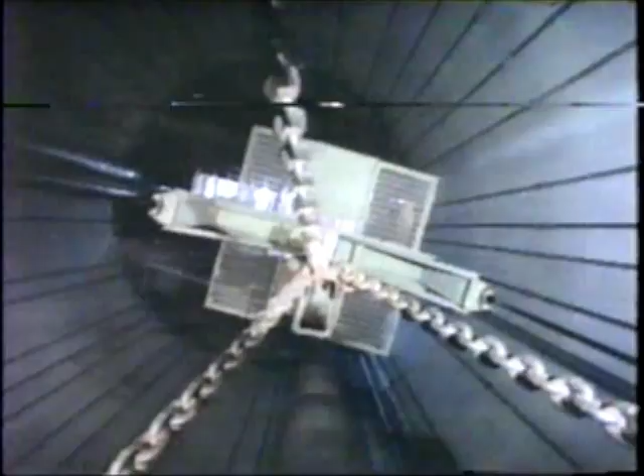Most of our problems were in the overburden, but after we got through that into the rock, progress went very well.

As we have seen, the ventilation shaft has a dividing wall separating the east and west ventilation functions, and it's connected to the main tunnel by two smaller air tunnels. Between these, in a huge chamber over the main tunnel, is the 80-foot gate building, which is part of the ventilation system. Back on the surface, at the top of the ventilation shaft, is a very large building which houses four huge fans and the computer controls for the ventilation system.

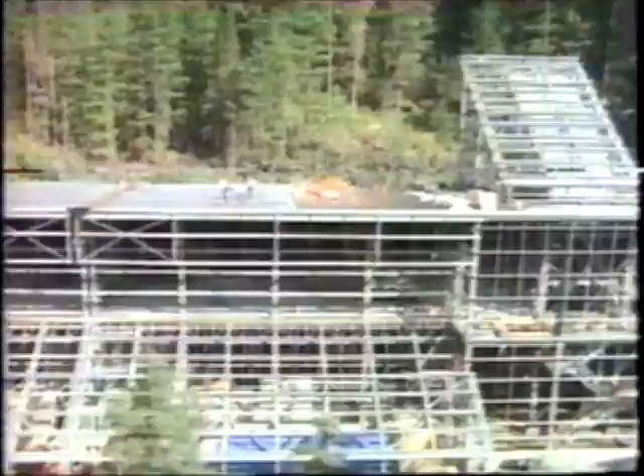And as we know, the visual impact on the environment is very important on this project. The ventilation building is located at the top of Rogers Pass in a very sensitive area, and to make sure that no part of the building was seen, we located it up on the slope away from the Trans-Canada Highway in an area where we have trees in excess of 100 feet in height. The building being only some 70 feet high, of course you can't see it.

Meanwhile, back on the surface route, the railway line was being laid for today's traffic and for the future. The ties and rail have been designed for the heaviest cars that we operate and will operate in the future, so it'll take care of future traffic. The track structure which we'll put in on the surface route will consist of concrete ties.

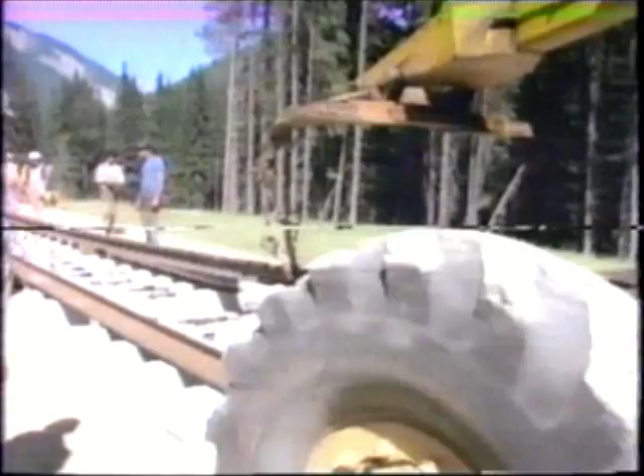They'll be spaced roughly on 2-foot centers, except for curves where they're spaced a little closer. It'll have a 136-pound welded rail, held in place on the ties by spring clips. The track will be ballasted with a good quality rock ballast.

The old system of wooden ties and iron spikes is gone, from the Rogers Pass project anyway. It's the largest installation of this new system on CP Rail. The advantage of a concrete tie track mainly is one of less maintenance. You don't have to change ties, and the question of changing rail is made easier and cheaper. Again, it's a cost reduction as far as maintenance is concerned.

And how about the tunnels? What will the rails be laid on in the tunnels? Pack track, which we're going to use in the tunnel, will be used only in the tunnel. The main reason for it being used only there is that it's on a rock surface, and that gives you the maximum support. If we use it on any part of the surface route, we'd have to lay a very thick base slab in addition to the actual pack track itself, which is extremely costly.

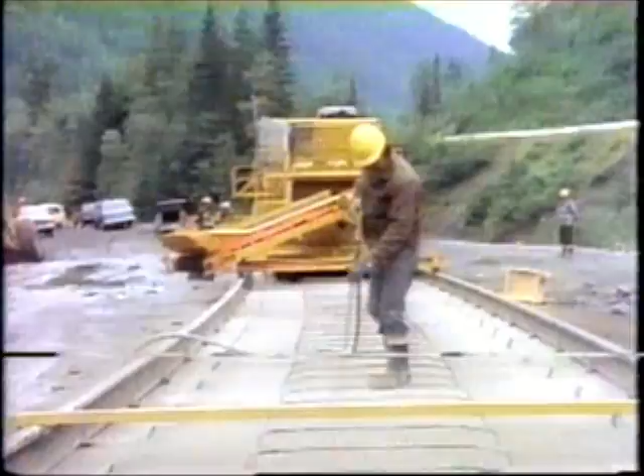Ed Taylor, supervisor of track design and development for CP Rail, was involved in testing the pack track system for the railbed before the final decision was made to use it. PACT track really is paved concrete track. It consists of 2 concrete structures, a base slab and a top slab, with continuous CWR rail, and essentially it's used primarily in tunnels. The idea is to get it established and determine its validity before it's installed in the tunnels at Rogers Pass.

Perhaps the integrity of the entire Rogers Pass tunnel project is based on how well the track performs. We're evaluating the entire structure, that is, the reinforced concrete base slab, top slab, the fasteners, the method by which they're held, and rail life.

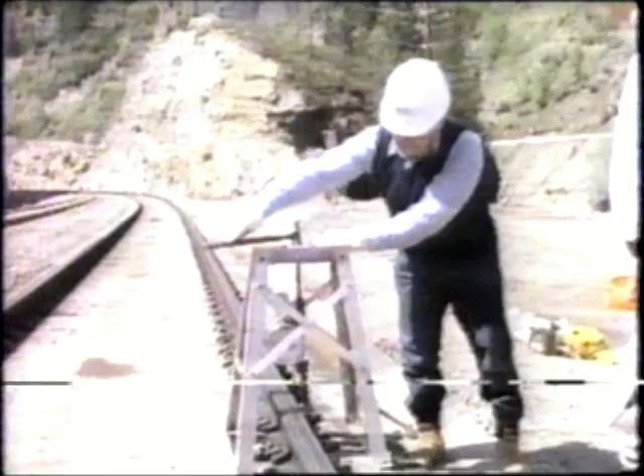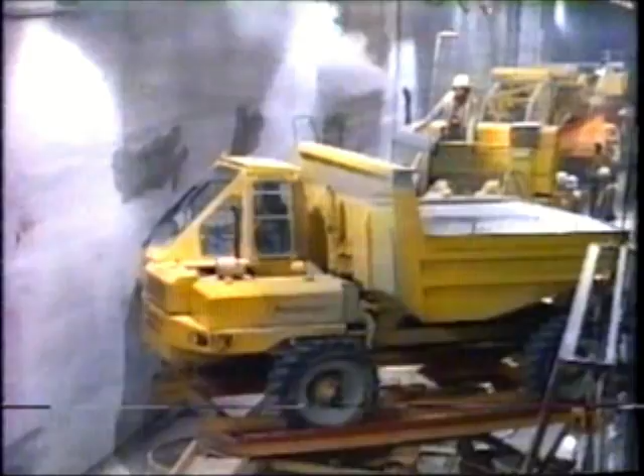The test section of pack track performed very well, and so it was installed as the rail bed for the track in the tunnels. Let's let John Fox have the last word. The main advantage of using pack track is the fact that there's very little or no maintenance required over the years that it'll be in service. There's no ballast to change, no ties to change, no spikes, no tie plates. It's virtually a maintenance-free system.

So with the new track laid on the surface route and in the tunnels, the Rogers Pass project is now almost complete. But first, the whole system on the new line has to be checked out in operation. A new line of railway is always inspected before you put it in service. The major reason is to ensure that the line is properly built and is built to the proper standards. In addition, you want to ensure that all aspects of safety are covered.

When we open the line up for regular traffic, we don't expect to do any further testing on our new line of railway. It should be in proper operating condition when we say go. You look at pretty well everything that comprises a piece of railroad. You check the turnouts and the switches, the rails, the welds, how the rail is fastened to the concrete ties, bridges, culverts, the entire structure of the railway.

You inspect all monitoring equipment, such as hot box detectors, dragging equipment detectors, high wide load detectors, CTC signals, power switch machines, and so on.

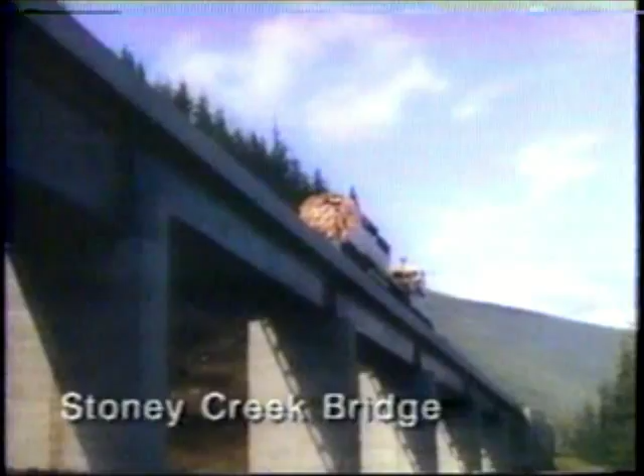All structures on a new line are inspected to make sure that they're properly built. We won't be watching any particular part of this new line any more closely than we inspect any other part of our railroad.

The viaduct is essentially a series of 90-foot bridges, and we don't have to do any particular type of tests other than put the thing together properly, which we've done. Our design and construction techniques were such that all we require is an annual maintenance inspection, which we do on a normal basis.

When we go through the short tunnel, you'll see the difference between it and the long tunnel. Remember, the short tunnel isn't ventilated, so it doesn't need a full lining like the long tunnel does to help the flow of air in its ventilation system.

Of 40 years service on the railroad and the trackage that I've been over, I would say this is the best piece of track that I've worked on.

When a train approaches the portals, it's on what we call a signal circuit, and in the signal circuit there's also a circuit that will actuate the door mechanism. The mechanism that opens the portal door is an electric motor with a chain drive to the shaft of the door, which raises the door up and down in a guillotine-type fashion. The portal door takes about 15 seconds to fully open up.

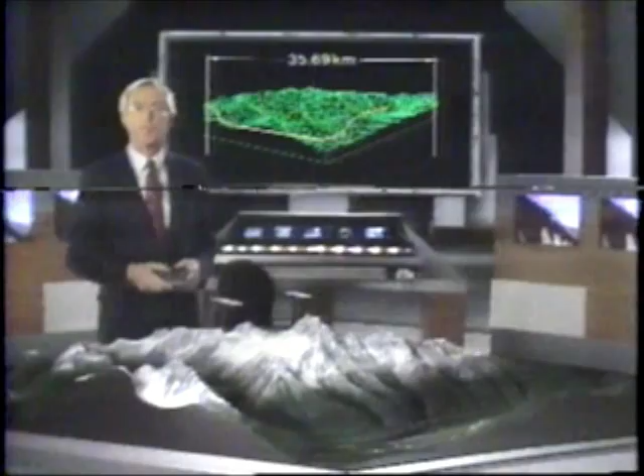The surface route, with its lesser grade, its culverts, its bridges, and the spectacular viaduct. The short Mount Shaughnessy Tunnel, and the Mount Macdonald Tunnel, the longest railway tunnel in North America, and the unique tunnel ventilation system. That sums up the Rogers Pass project. All 35 kilometers of grade reduction built to increase CP Rail traffic capacity westbound.

And now what's next? Well, the last thing that we'll do so far as the whole project is concerned is put in the last clip in the track structure at the west, near the west portal.

November 9, 1988, marked this long-anticipated event, the end of 5 years of hard and dedicated work by hundreds of people. Most of those workers have now moved on to new challenges, but many return to ride a special train over the new line to its western end.

And what could be more appropriate to celebrate the end of construction in these mountains than a little mountain music? There's your alpine horns.

Good morning, ladies and gentlemen. What do you think of that train ride?

In a few moments, we will attach the last railway clip to a concrete tie. But before that, I would like to personally thank each of you for coming out today to witness the event and for being part of it. Our children and their children can look back and say that their father or mother worked on this project. History will show that the Rogers Pass project really is an engineering and railway marvel, unsurpassed for its time.